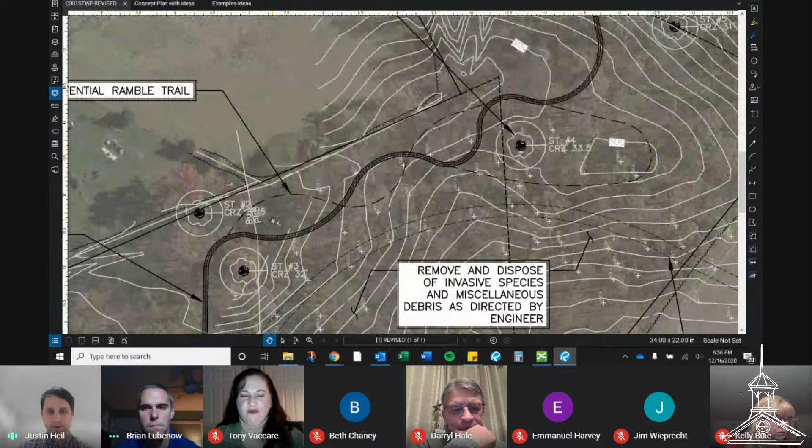So that's kind of where this ramble came from - it creates little pockets here that you could highlight. You could have your sculpture garden here, a little maze area here, a native sensory garden type of area here, and that would play off our main pathway still connected into the trail system from the main concept plan. This could be a very small, minimal trail with just natural material, and doesn't necessarily have to be whatever the main trail surfacing is.

Which leads into another talking point - the planned surfacing for this trail. I know there's discussion of a rubberized surfacing, and I wanted to hear what the reasoning was, why you were thinking that would be a good surfacing for the area. I'm not sure if you have any specific reasons for that - I'm just curious, because there are numerous different options we can do throughout the system here.

Well, I think the rubberized trail idea came around because we knew we didn't want to go with engineered wood fiber or mulch. We wanted to make it completely ADA friendly, accessible as possible. Various vendors had reached out to us - Darryl had received some emails and sent them on to me from vendors who work with rubberized trail material. So I reached out to several of the vendors who work in our area and got estimates on that.

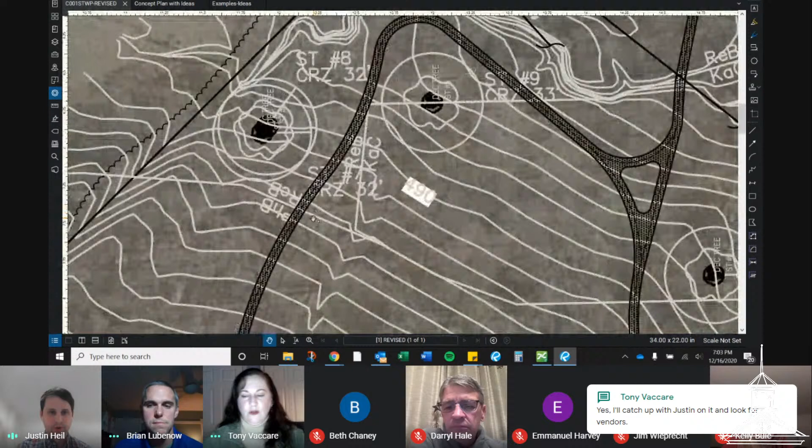It might need to be wider, not for them to put the surface in, but to level an area to get an acceptable cross slope in, and to tie it in. I'm not saying this is an issue area, but it kind of looks like it—these contours are spaced a little closely together. We might have to start to pull them apart to create a more level surface as you're going downhill here. As you pull them back, you have to tie it into existing conditions, but you also don't want to create a drainage situation where you're creating a swale or a waterway going down your pathway, which would create washout at the bottom of it.

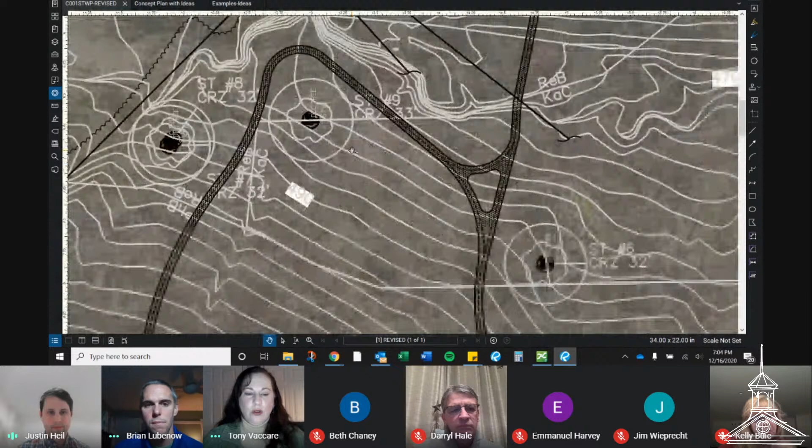While you've got it zoomed in on that, I did want to ask if we could bypass going down on that loop. Can we just take the trail and avoid going around those two big specimen trees at that hairpin turn? The vendors that came out to look at the proposed area said that one big tree at the turn has roots so far out that in order to get past them, it might even damage the tree if they have to cut into it to get the path constructed as designed there. So I don't know.

That's certainly not a critical piece of the design. I think the idea was just that there's a stream coming down, so it'd be a nice place to loop around, but there's no reason we can't just tie in more directly. I think if we could, that would definitely save a little money, and it would save all of the hacking of the tree roots and all that. Yeah, no, I'm all for saving trees.

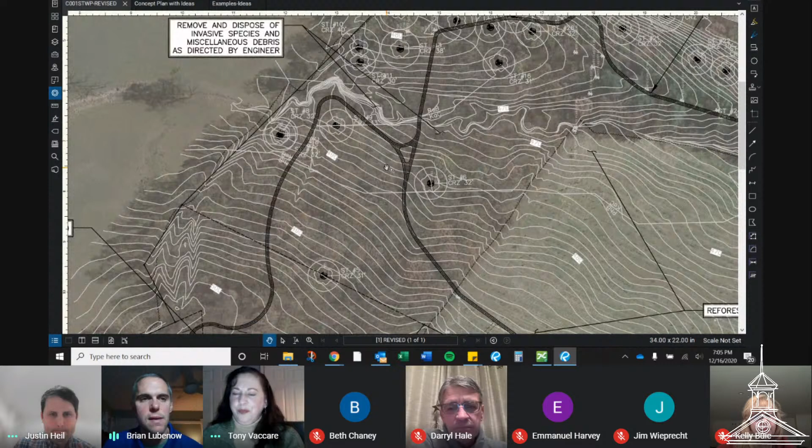Okay, that gives me a better idea. If I can just back up one second, could you switch back to that plan that showed the concepts, the ideas? I just want to be clear that we're talking about the right area. I guess everything shown there is hatched in the black ink.

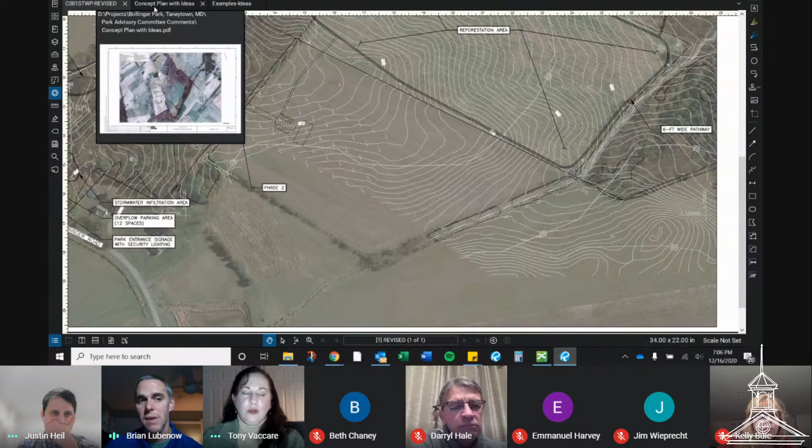I just was curious if we should be considering that at all in the long range picture, but it sounds to me like maybe not.

The other question I had, as far as the Ramble Trail and incorporating some of the ideas we had, I can see the meditation or sculpture garden, and if there was a maze area, those would be okay in the wooded area. But as far as a pollinator garden, I'm just concerned with the tree cover, maybe some lack of sunlight there.

And I think that's why we chose that area. Plus we wanted a relatively large area, and the area that was selected was about 2 acres. So we would really be diminishing a pollinator garden if we put it into the woods up there by the Ramble Trail.

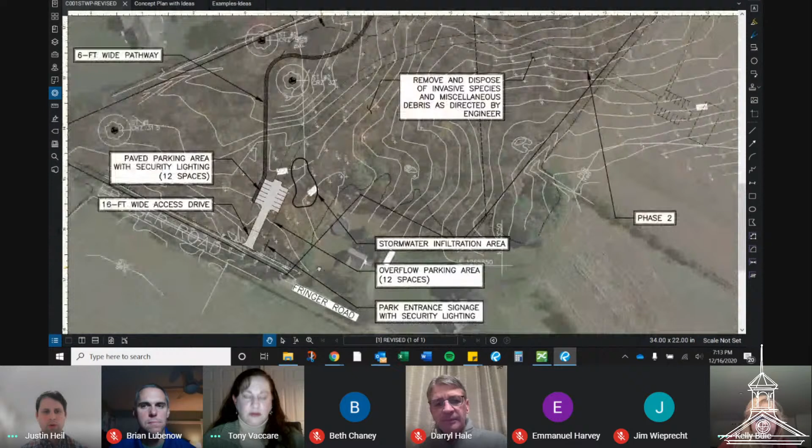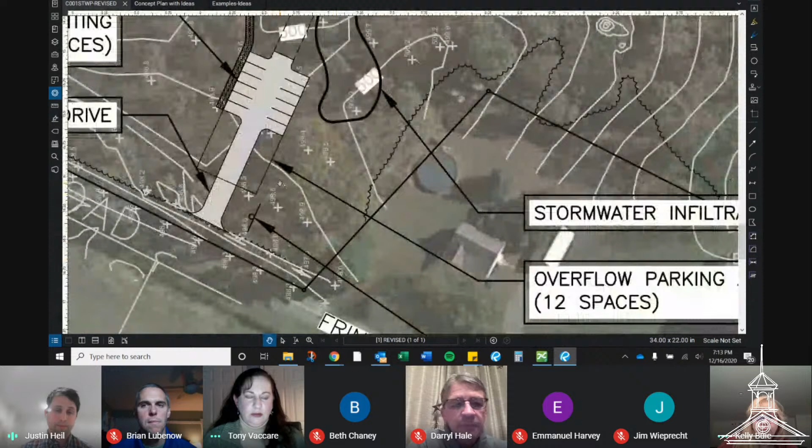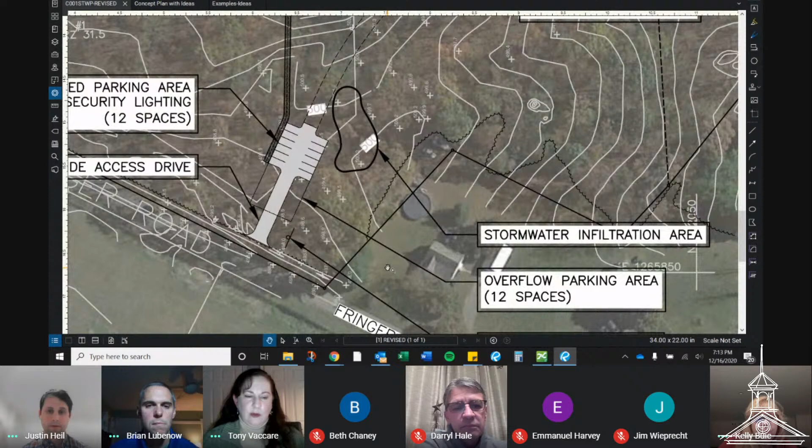Yeah, whether it's stone or it's just seeded and reinforced in some way so you can have overflow parking here and there. That's exactly what was envisioned for that - those peak times when you needed more, but we didn't want to be spending all the money on pavement and also having all that impervious area that we had to provide stormwater management for. So that was a good compromise of the two.

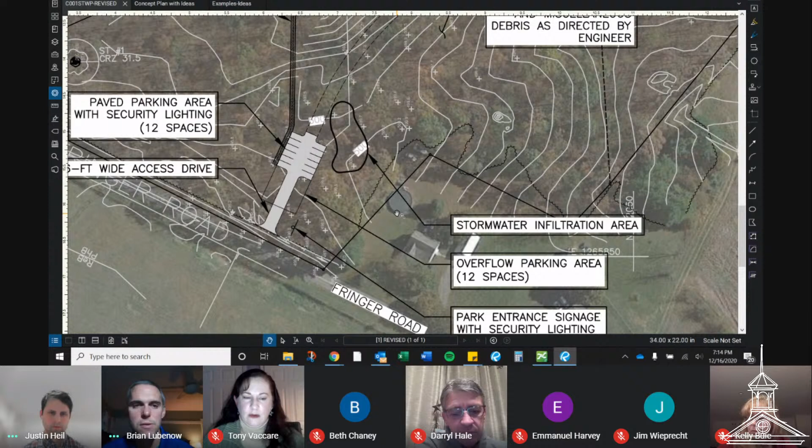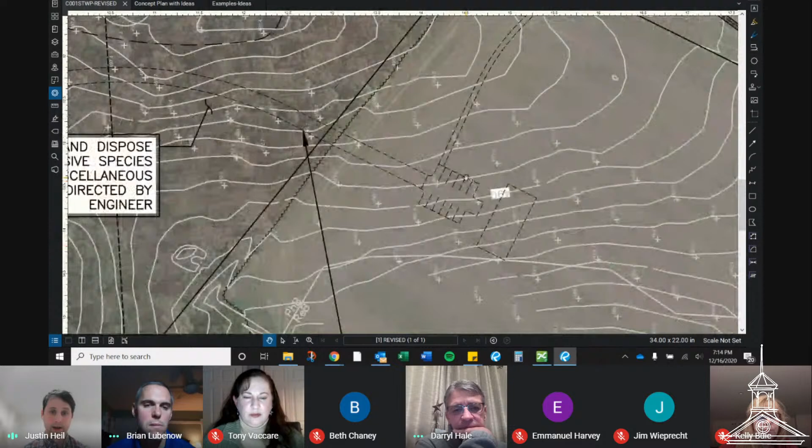And then for phase 2, this parking lot, as you can see, there's ample room for expansion. We could call it out or show it larger if there's expectations that people might be parking here to access over to the main loop. This can certainly be expanded.

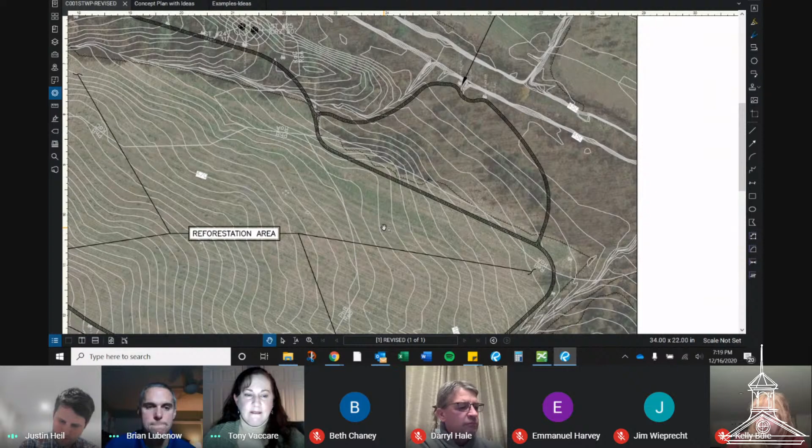I'm just going to look back at my list of things we wanted to talk about. Site security—you were going to talk about that. Yes, thank you, that's a good point. This was something I discussed with the previous Parks and Rec director, and was a concern of the neighbors: how would this be gated at the entrance? Do we want cameras? Would the gate be opened and closed daily by the city or the police department? Those are things we don't necessarily need answers for now, but items to be thinking about. I don't know if anybody has initial thoughts.

I don't believe that it needs to be gated. But if any members out there have a discussion regarding that, I'd love to hear it. I think the park should run just like the others—dawn to dusk or whatever the rules are. People are pretty good about that. There was a little bit of tension about this park when it first came online. There are concerns, and those are very important to the city, so we've been thinking about that and working with our neighbors. But I just think it should be like any other park.

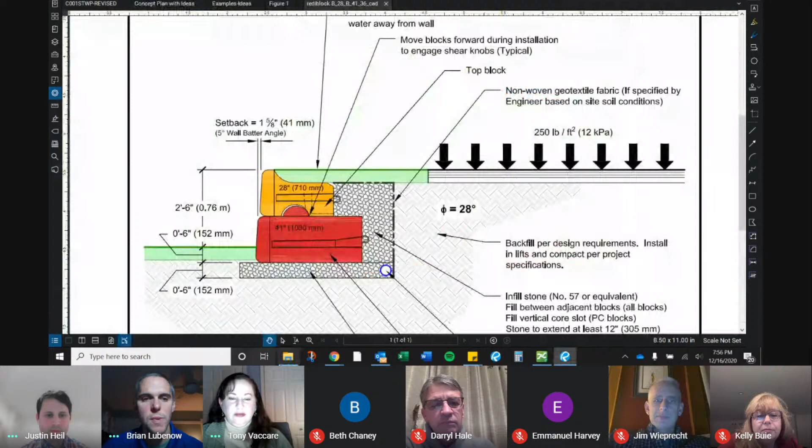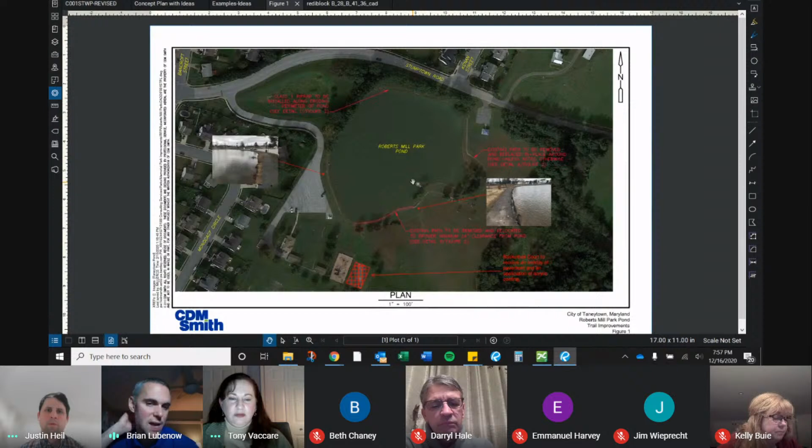Yeah, I'm going into that folder here, just pulling up the stuff I pulled down for. Perfect. Yeah. So we had talked last about the areas where the bank was eroding and we did not have space to push the pathway further from the bank. That's namely in that embankment area, up further on the street.

Yeah, like in that kind of area, using that rediblock system, retaining wall, large concrete blocks. I know we've gone back and forth on how we would do that, both aesthetically, whether we want riprap or some kind of retaining wall. We kind of settled on that rediblock as being a good compromise, and it's nicer looking than riprap, and a little cheaper than some of the more involved options.

I know a natural solution is something that we've talked about with reinforcement and a vegetative approach, and I think Justin has something he's going to share on that. I think that's a great idea. I just know that in some areas, you want to still have areas for fishing, and that's not really conducive for that.

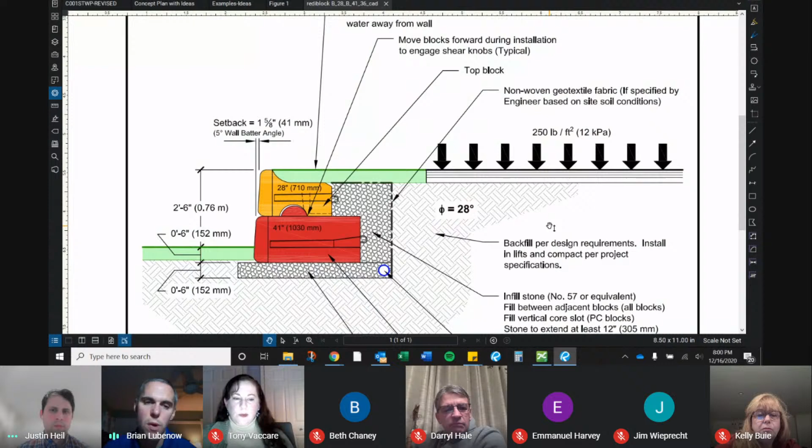I mean, you'll be 2 feet set back from the top of the slope, I believe. Right. And also looking at the stormwater regs as far as wet ponds go, it's not a steep slope once you get into the pond area. So it's what they would refer to as an aquatic bench in the state stormwater manual. So we are meeting that.

So yeah, I think we use rediblock walls a lot on projects, and they're a good product. We use them for all sorts of different projects. So we have experience working with them.

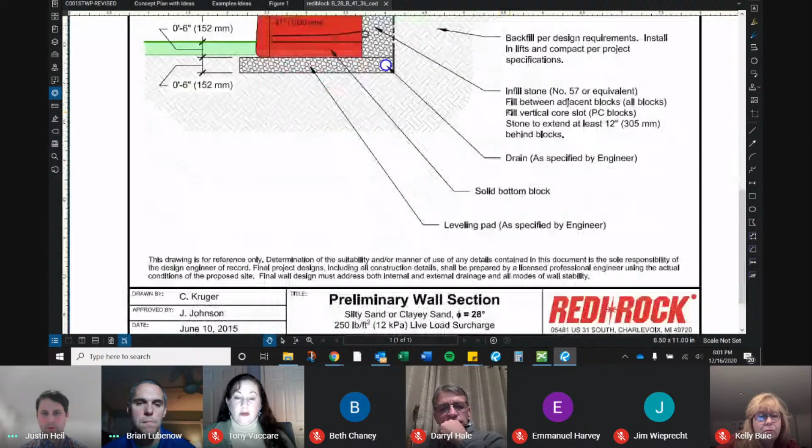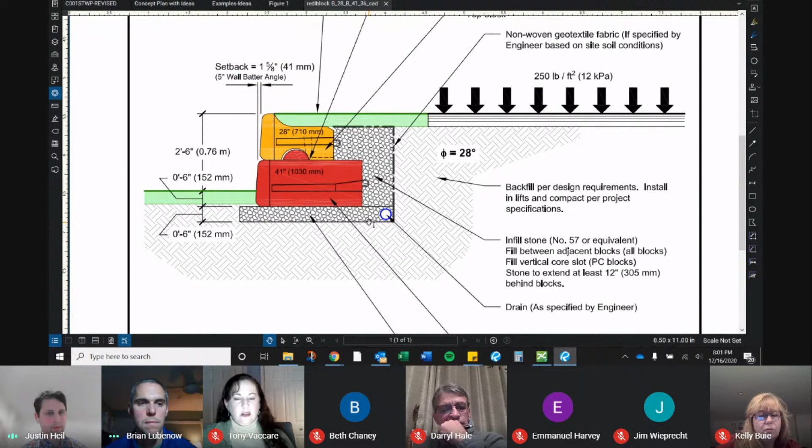I guess I know they probably gave this as a quick turnaround for your wall section here, but I was just looking at it deeper. I was a little curious how it would work with where the water line would reside here, and Brian, you can talk more about this probably, but the drainage layer and the leveling pad for the gravel and the drain doesn't seem like it would work in the application of adjacent to a pond like this.

Yeah, you're absolutely right. I don't think they understood fully where it was being utilized. Yeah, and that's sort of their generic approach, like you suspected. It wasn't necessarily project specific, but yeah, you're right. That would have to be tailored a bit.

And I guess backing up a little bit, the idea still would be to push the trail, the pathway back where we can. So that's the hatched area there at the bottom, and use the Redi-Rock in the area where the embankment is. We really can't do that in the area where that photo is pulled out.

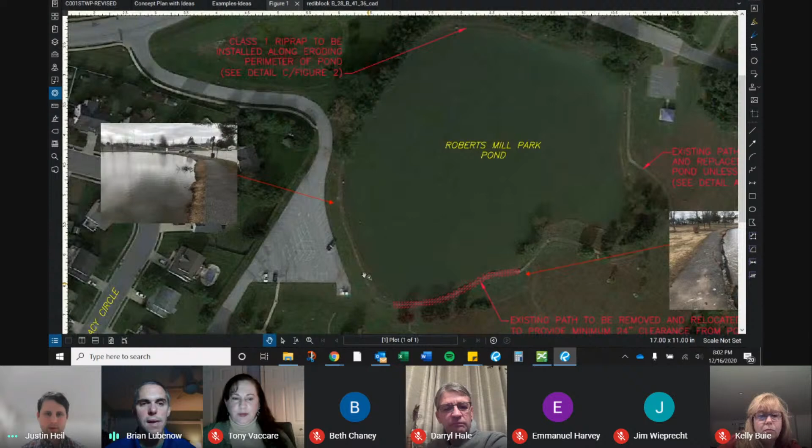And then you had mentioned the area along here might be a good example, and a good potential solution would be to use some more natural solutions. There's already existing trees and vegetation in there, so it seems like we could grade it out and utilize live stakes. You can even—I see riprap being called out currently, but that was an older call out from when that was the plan.

Yeah, it's a little bit. We could even integrate it. I mean, we've used riprap, and it's hard to install, but you can use larger riprap and fill it with soil, then drive your live stakes into the voids between the riprap. You get the immediate protection of the stone, and eventually the live stakes grow, giving you more of a vegetative look. We've used that along the Delaware River, so it can certainly hold.

But there's different geotextile solutions and organic matting and all sorts of cool products out there that give you more of a naturalistic look, but also have the power to control erosion issues. So I think looking at some of those might be good along the more natural edge of the pond.

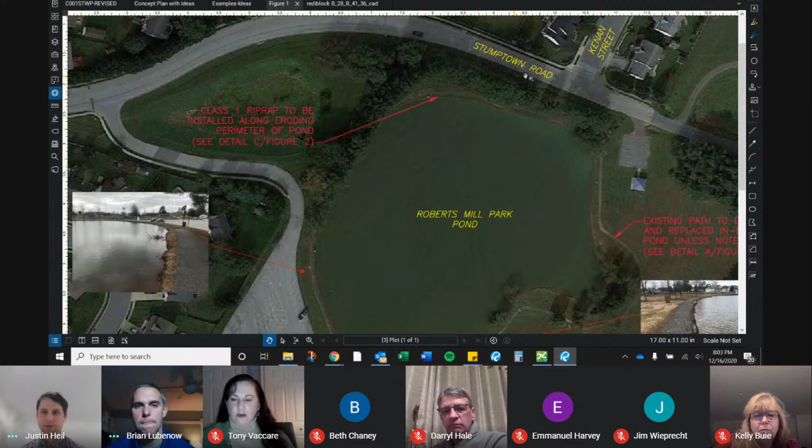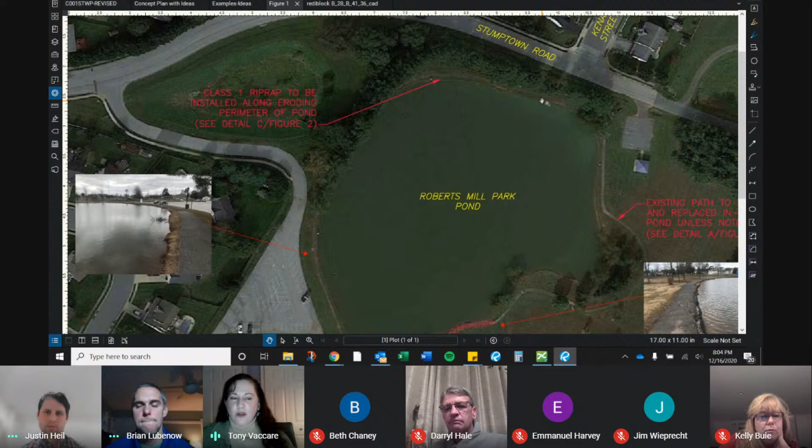I have a couple of questions. First of all, what is your estimated pricing for Redi-Rock, the retaining walls?

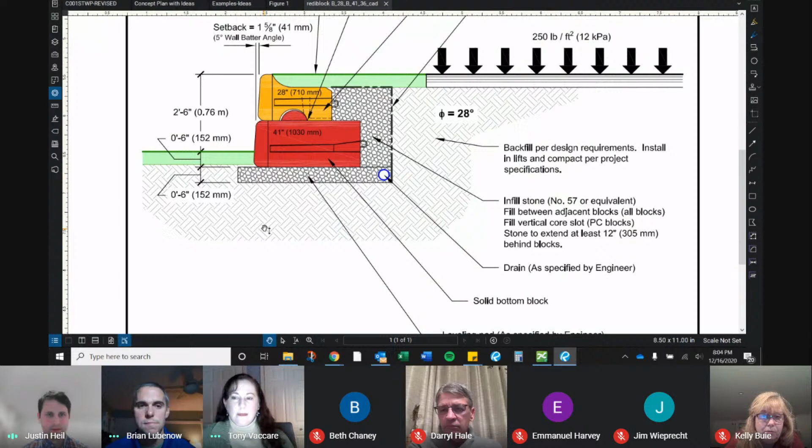I don't have anything specific on that at this time. I can ask them about that, they're pretty good to work with. I could try and give them a call and just see if we can get a price. This is just a 2-block system here, so obviously the shorter the wall, the cheaper it'll be. But it is a relatively long run along here. Yeah, here, so.

And the other question I had was, when you were talking about the riprap and the live stakes, are the live stakes plantings?

Yeah, so they're cuttings. They're usually like a willow, usually black willows, and you cut a stake. Basically you cut a branch about, I don't know, at least a foot or two, and you just cut one end at an angle, make sure the angle is facing downward, and then you literally just drive it into the soil about halfway while it's dormant, usually in February or March, and they just go wild. It's a really cheap solution. You could even, that's something a lot of localities do on their own, because all you have to do is have the knowledge to know what to cut, and then you're just cutting 2-foot segments and driving it in by hand. A lot of times you can just pre-drill the hole so you don't damage the branch, and each branch is only maybe half an inch in diameter, so nothing large.

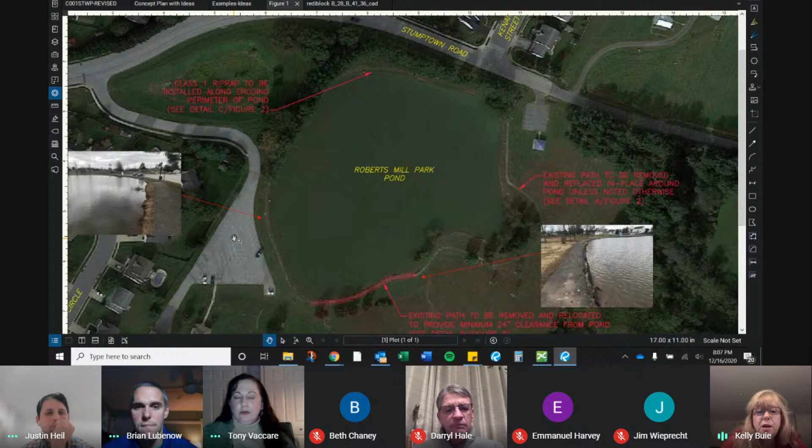All right. I think as far as where you were showing the pavilion, but I think when the bottom of the screen where you have the walking path and it kind of dips into where there's other trees at, right in there. Is that an issue to develop or no?

That hatched area was an area that we had talked about before, just pushing the pathway back further from the pond, because there's really no reason you can't in that area. The slope isn't prohibitive, there's nothing really in the way other than those trees, but there's space between the trees and the existing pond edge to do that. We could even bump it on the other side of the trees if we needed the space. But you can see that's the area in that photo there to the right, that's probably the worst area. That is.

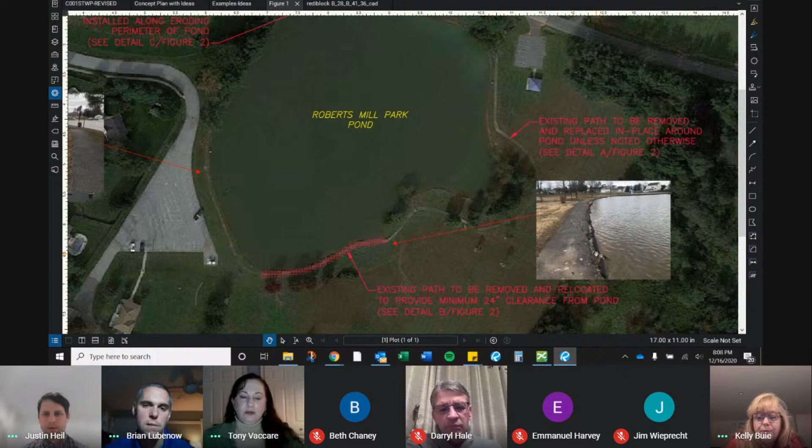And what's our timeline then looking for this? Well, this is a pretty quick plan to put together, I just think we need to have consensus on what the approach is. I do think we need to be careful how much of the fishing area we take away, because I think that is a popular part of this park, and I do think that area near the pavilion is a popular fishing spot because the parking is there. I agree with that, Beth.

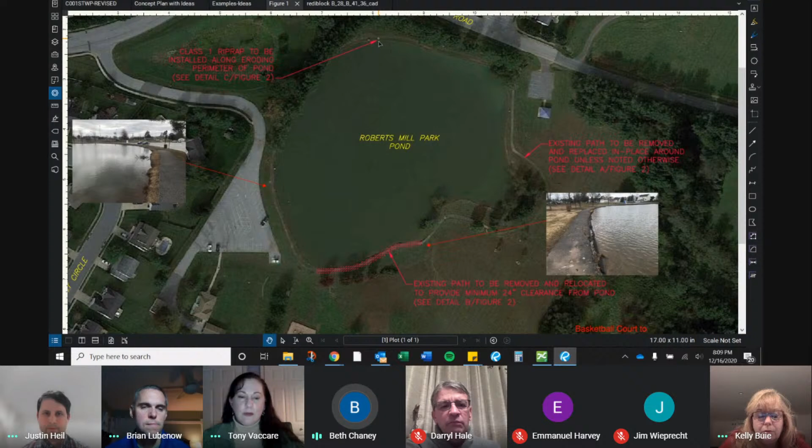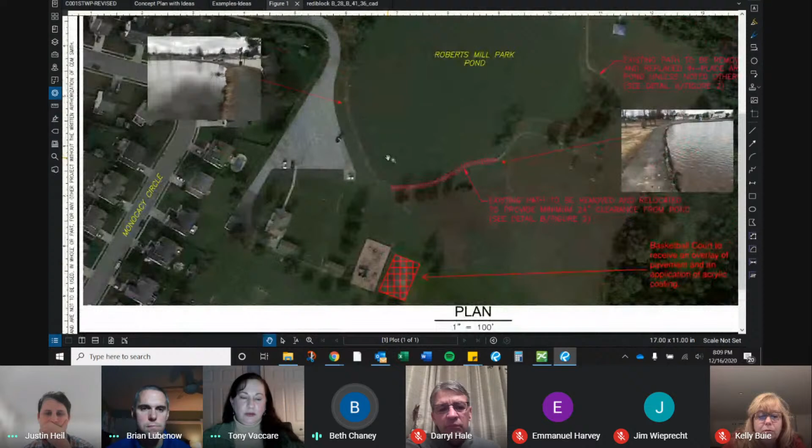Okay, that was going to be my next question—are there areas that are heavily fished? Yeah, I think right there where you were talking about near that pavilion, and then as you go up farther into the left, kind of where that red arrow is up top, I think that's a pretty popular area too, that side of the pond. Okay, so it's more over here, not so much down this way? Right, because that area down there kind of backs up to the soccer fields, so I don't know how heavily utilized that is for fishing, but I do know the other side is utilized for that. Yeah, and that's where the drain off is too, that kind of goes into that. So probably not many kids are around that area either.

I think one approach here is we get a better idea of what the cost is per foot of that Redi-Rock, and kind of see what the city has to spend on this. The cost associated with moving the path and repaving the balance of the path is something we can estimate pretty closely. And then whatever's left is how much of that linear footage of Redi-Rock you can put in.

Some area, it's just, I don't think for the budget that we've talked about, I'm concerned that we're not going to be able to reinforce the entire area of concern using that solution. We might have to go with, it's either going to cost more money or it's going to have to go with a less expensive solution, kind of like what Justin was talking about. So again, I think it comes down to timing, when we can come to an agreement about what approach we're using in which areas.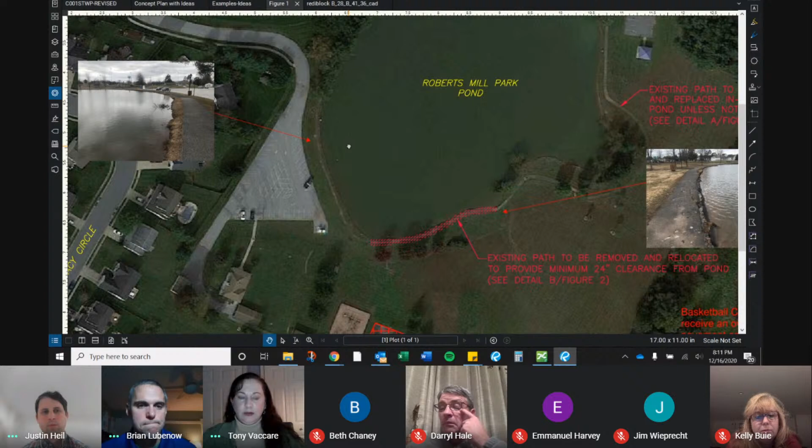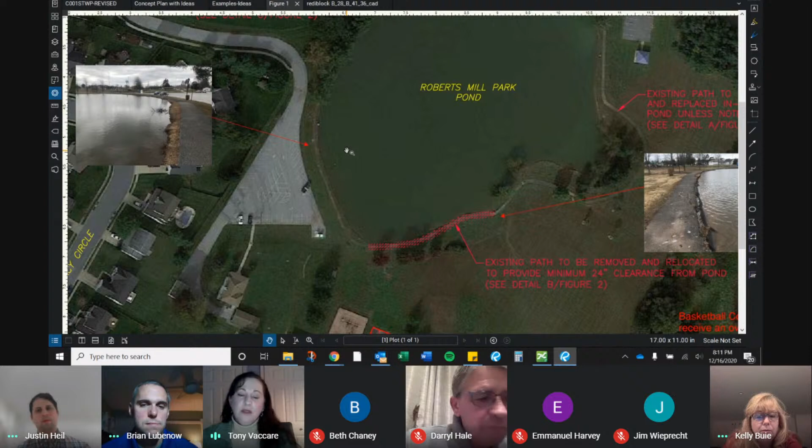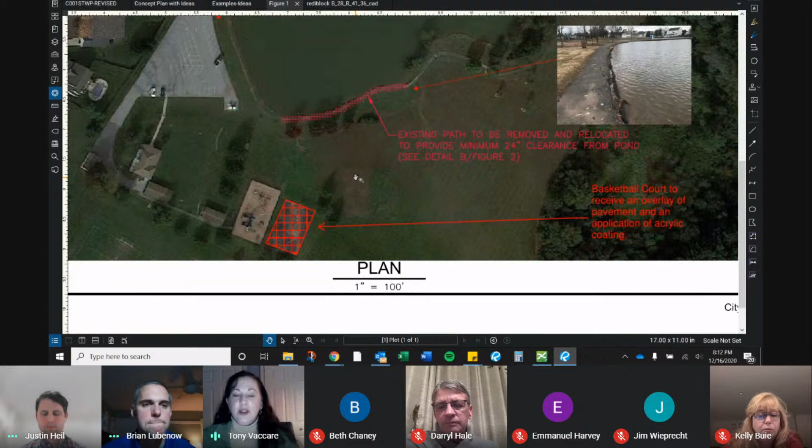Okay, well that sounds like a plan. Once we get an idea of how much the rediblock is going to cost, then I can reach out to a couple of contractors to get an estimate on what it would cost to repave the good portions of the path, and then move the portion that we need to have moved. Also, the basketball court is part of this project, so that'll have to be folded into the cost as well. That should be a simple job—just fill the cracks with that overlay of asphalt and then the acrylic coating. Then we'll have an idea of how much of the rediblock we'll be able to afford.

That sounds good. Yeah, that would be great, Lorena. We'll work on the rediblock side and the retaining wall side. If you can get some pricing on the paving and the pathway, that would be great. Yeah, all right, I will do that, and we'll be in touch and compare our numbers and go from there. Okay, so let's say that happens within the next two to three weeks.

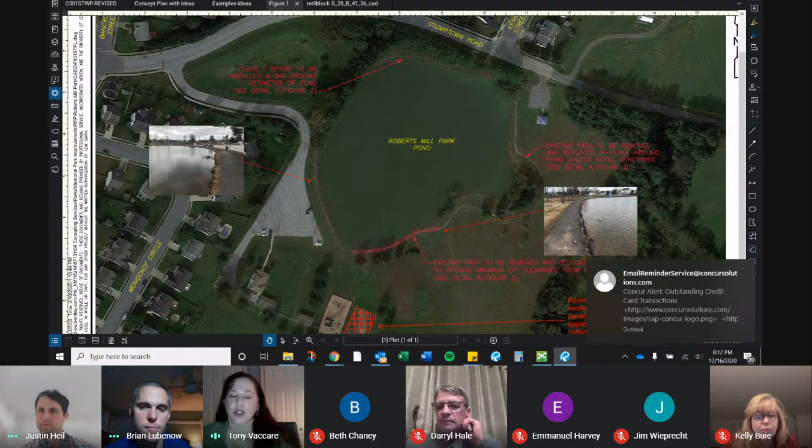Then what do you think we can put together as far as getting the RFP out there? Do you think this is something we can maybe have awarded so that we can get the work done late spring, early summer? Yeah. So we started the RFP some time ago, and then just got stuck on this erosion reinforcement decision. So a lot of it's done.

The only thing that—and I guess Jim, as far as the planning commission, I don't think they need to see anything on this. My permitting approach would just be to have the contractor apply for a grading plan through the county. I think we'd still be under the disturbed area that requires the conservation district to review and approve it. So that's the approach I think we could take, which happened very quickly. I agree—as long as we can stay under the disturbance thresholds, the planning commission doesn't need to see this.

So yeah, it'll just be a matter of getting—okay. So I think putting the NOI back on the contractor and putting the grading permit on them would be the quickest approach. So to get back to your question, Lorena, that could all happen. I think we could have bid documents prepared—I know we've got the holiday here, but this winter certainly—to get something out to bid and through the bidding process so the contractor can be working in the spring. Okay, great.